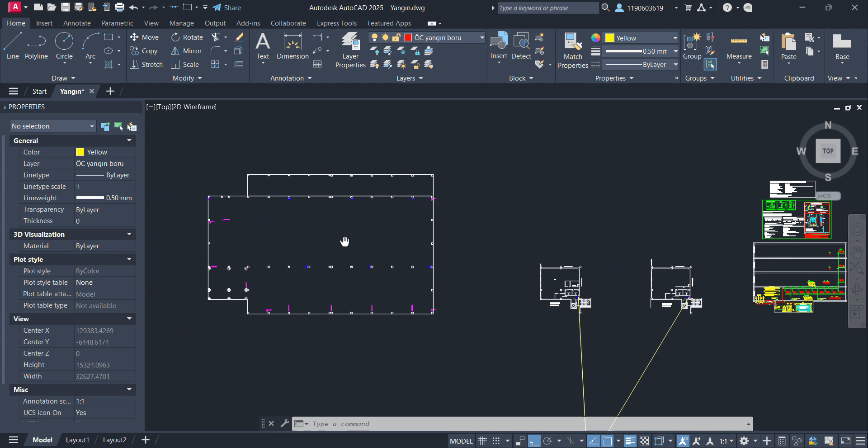I'm Ahmed, and in this video, we will discuss the fire protection system. We will specifically focus on hydrants, HDPE pipes, and fire cabinets, Yangın Dolapları.

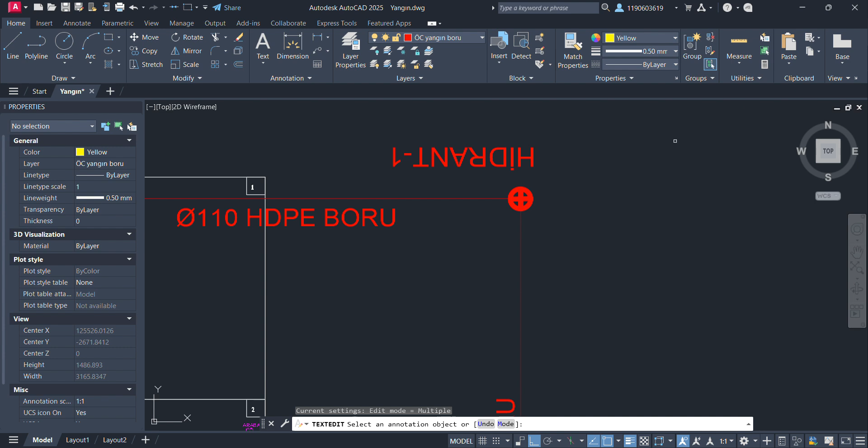Stay with us. This is a 200 square meter factory project, and this is the fire protection plan designed using AutoCAD. The system primarily consists of 4 hydrants, as shown in the plan. They are positioned at each corner of the factory's exterior, and their function is to supply fire trucks with water in case of a fire.

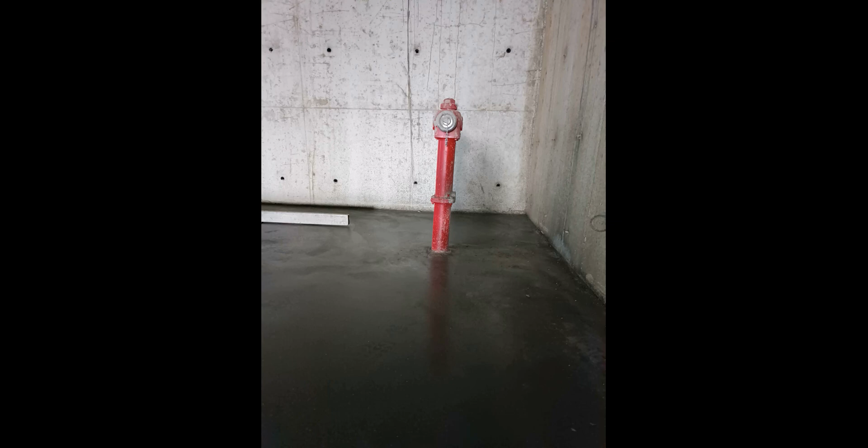These hydrants are connected to HDPE pipes, which are installed underground at a depth of 1 meter to ensure effective water supply to the hydrants. HDPE pipes are chosen for their distinctive features, such as corrosion resistance and ability to withstand high pressures, ensuring the system's durability and efficiency during emergencies.

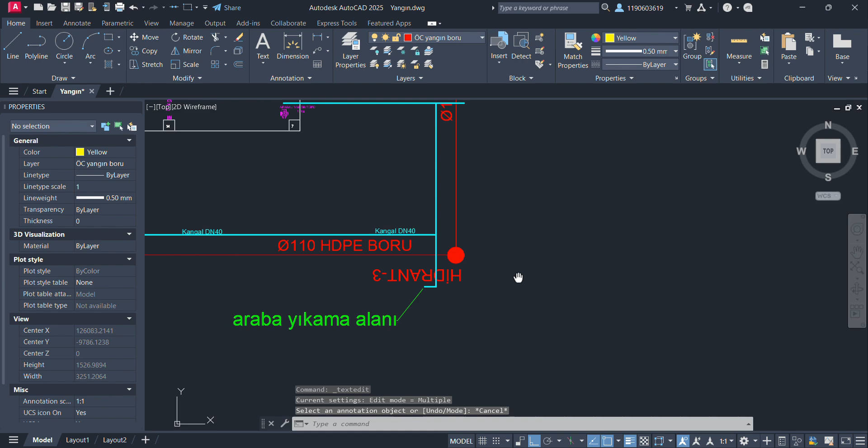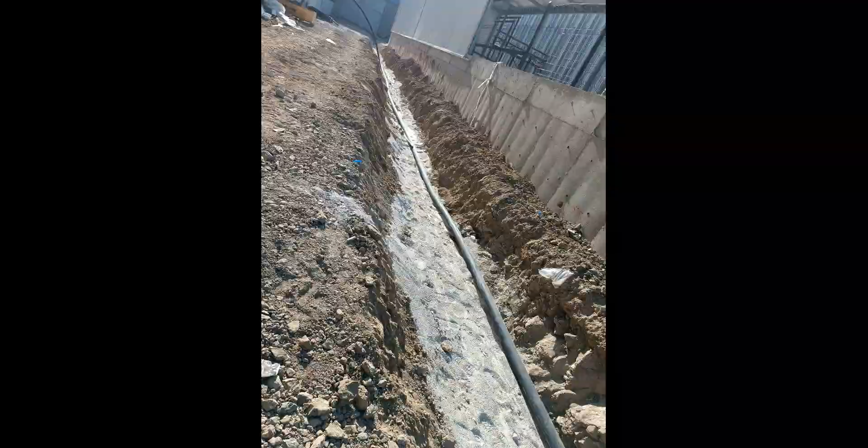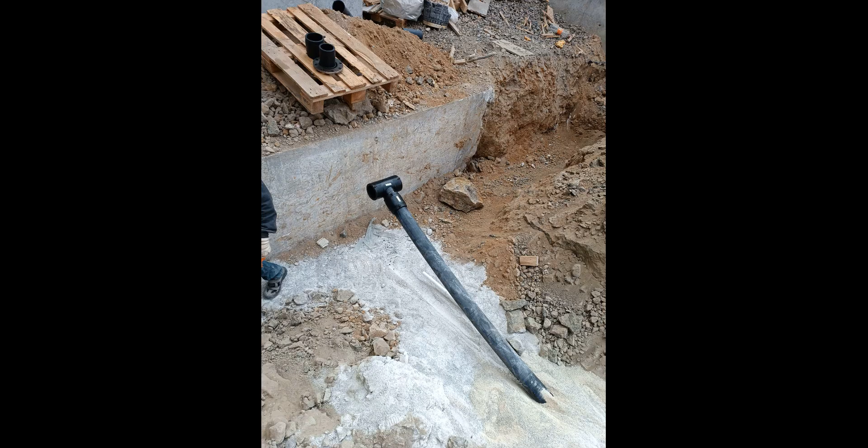Here are some images illustrating HDPE pipes, which are made of high-density polyethylene, HDPE, and are primarily used for water and liquid transportation in infrastructure projects. These pipes are known for their ability to withstand high pressures and their high resistance to corrosion and chemicals. Due to these features, HDPE pipes are an ideal choice for water supply systems in fire protection systems as well as for sewage and water networks.

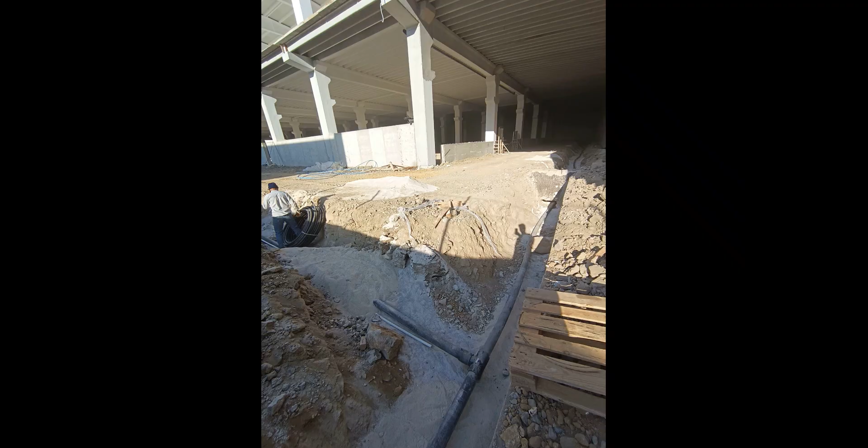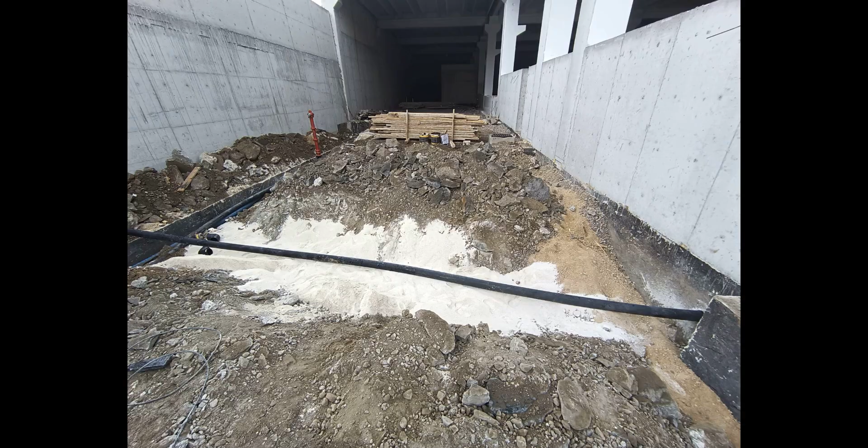Key advantages of HDPE pipes: corrosion resistance. They are not easily affected by chemicals or environmental factors. High flexibility. This makes installation easier in areas prone to ground movements. Long lifespan. They can last for extended periods without requiring intensive maintenance. High strength. They can withstand the high pressures they may face in firefighting systems.

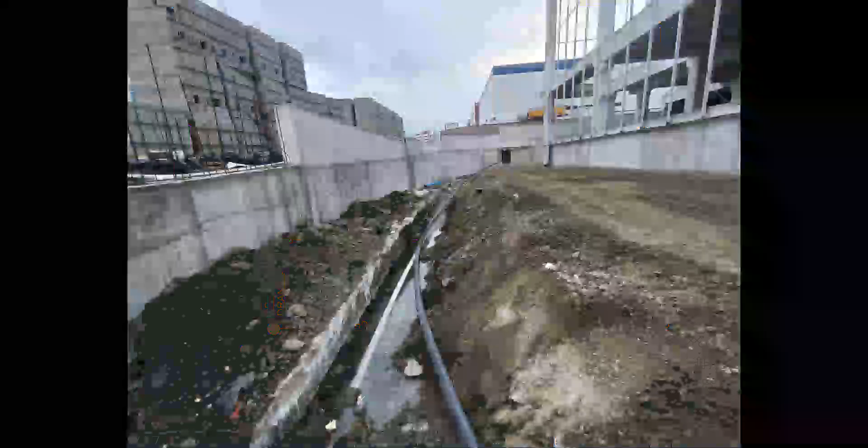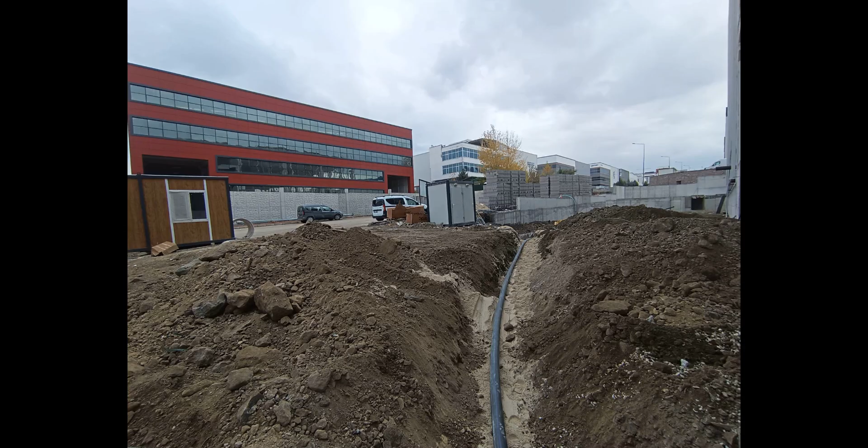The sizes of HDPE pipes vary depending on the number of hydrants used in the project. In this project, 4 hydrants were used, so DN110 size was selected for the HDPE pipes to meet the system's needs effectively. DN110 size means that the internal diameter of the pipe is 110 mm.

The pipe size is determined based on several factors such as water pressure, transport distance, and number of hydrants. In this project, this size was chosen to ensure an adequate water flow to the 4 hydrants with the ability to withstand high pressure during emergencies.

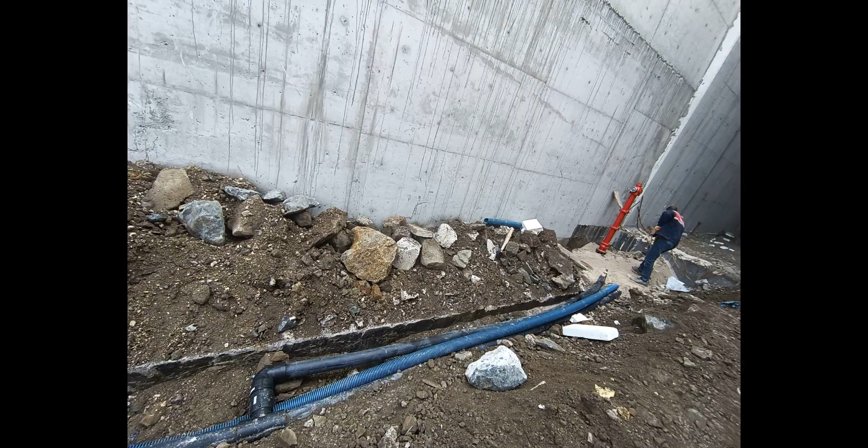Detailed explanation of DN110 size. Internal diameter. DN110 allows a large volume of water to pass, contributing to the system's efficiency. Pressure. The pipes are tested to ensure they can withstand high pressures, especially during fires when large amounts of water are required. Effective water distribution. This size ensures balanced water distribution to all hydrants, ensuring the system's effectiveness during emergencies.

After digging to a depth of 1 meter, fine sand is poured into the bottom of the trench before placing the HDPE pipes. The purpose of this step is to protect the pipes from damage that may occur due to rocks or other materials that could crack the pipes or cause leaks. If the fine sand is not poured, rocks or sharp objects could create holes in the pipes, leading to water leaks or even the failure of the system.

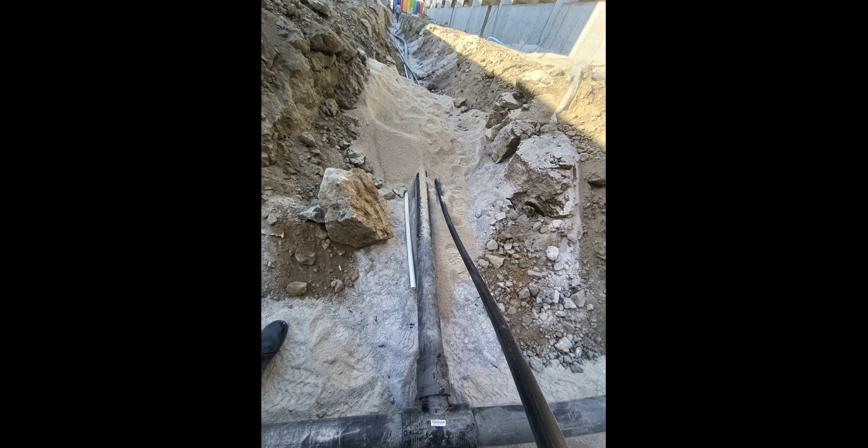Detailed explanation of the importance of pouring fine sand. Protecting pipes from damage. The fine sand acts as a protective layer around the pipes, reducing the risk of friction with rocks or stones during digging or transport. Preventing leaks. With the sand layer in place, the likelihood of leaks caused by uneven pressure or impact with rocks is minimized.

Ensuring pipe stability. Sand helps to stabilize the pipes in the ground, preventing unwanted movement due to ground shifts or vibrations from heavy equipment. Improving performance. Thanks to this protection, the pipes remain in good condition over the long term and function efficiently without issues related to water leakage.

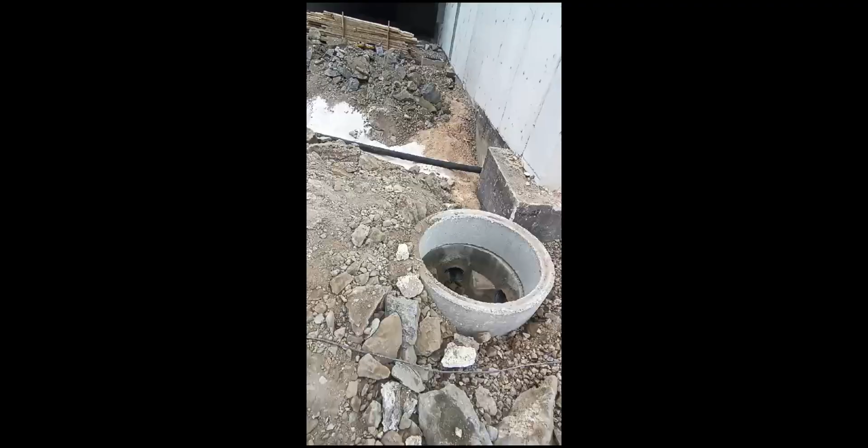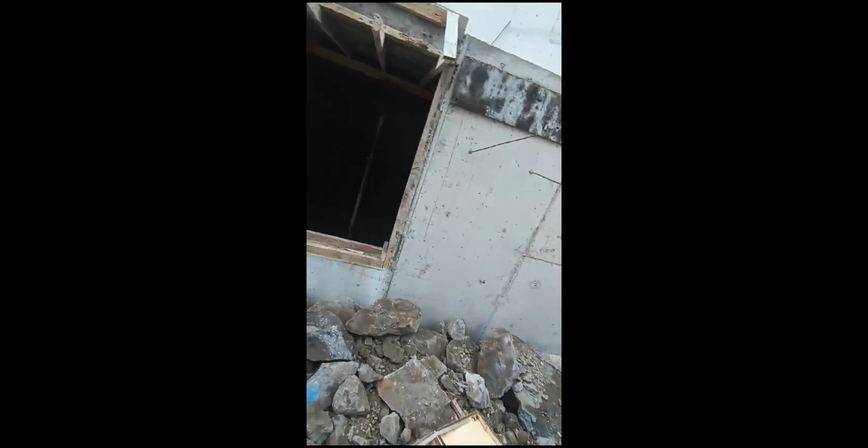After installing the pipes around the factory completely, the pipe is routed into the building to supply the sprinkler line, if present, or the fire cabinet line, Yangın Dolapları, with water. This step is essential to ensure an adequate water supply for the fire protection system inside the building.

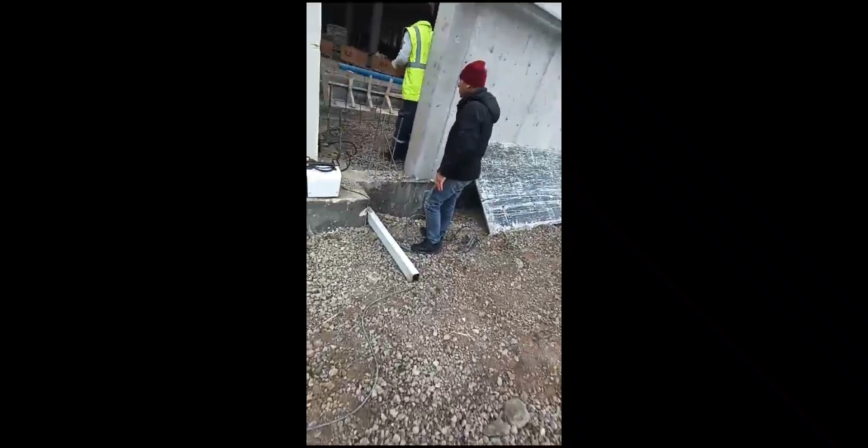The pipes are connected properly to ensure water flow to all points that require supply, such as sprinklers and fire cabinets, enhancing the system's effectiveness during emergencies. Detailed explanation of this process.

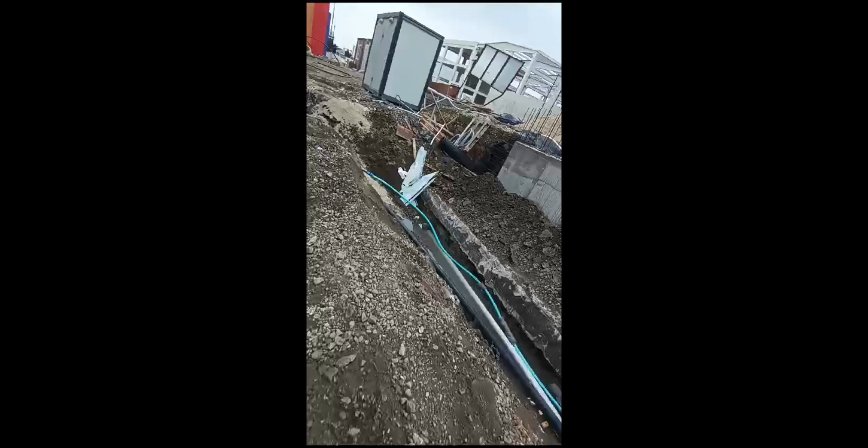Supplying sprinklers. When a sprinkler system is in place, the pipes are connected to provide a continuous water supply during a fire, helping to extinguish the fire quickly. Supplying fire cabinets. For fire cabinets, the pipes are connected to supply water when firefighting teams need it for fire suppression. Ensuring adequate pressure. Through this process, it is ensured that there is sufficient pressure in the lines to provide water efficiently to the critical points inside the factory.

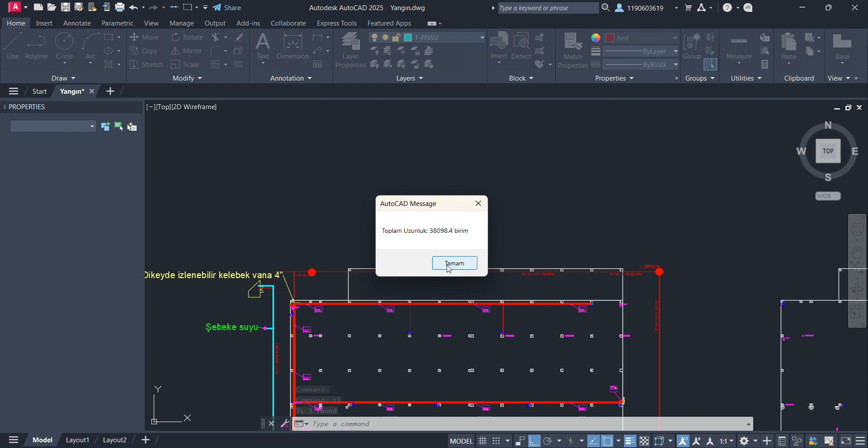In this project, the black pipe shown in the previous video is the HDPE pipe. Now, let's explain about the fire cabinets, Yangın Dolapları, in this two-story factory. 18 fire cabinets have been used to supply the system. The pipes used inside the factory to feed these tanks are either black pipes, siyah boru, or galvanized pipes, galvanized boru. Galvanized pipes are the most resistant, and are generally used in high-risk situations.

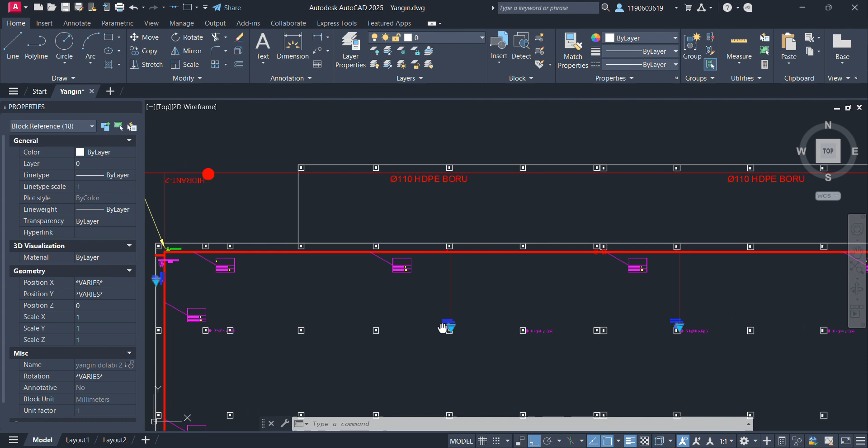The type of pipe is chosen based on the risk level in the factory. If there is high risk, such as the presence of flammable materials or industrial processes that pose a significant threat, galvanized pipes, galvanized boru, should be used to provide the highest level of safety in the system. If the risks are lower, black pipes, siyah boru, can be used.

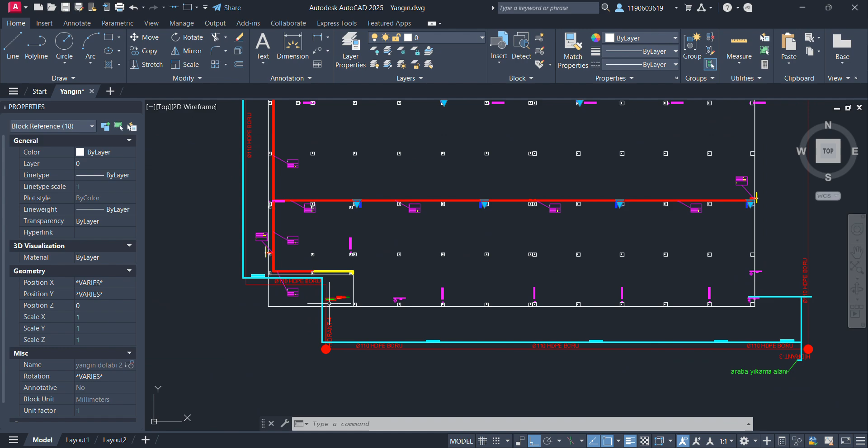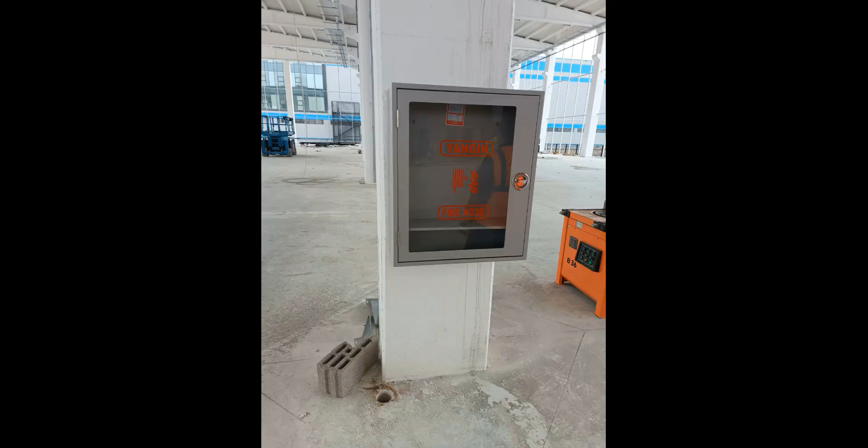The image shown displays black pipes, siyah boru, and galvanized pipes, galvanized boru, as well as water tanks. These tanks are connected to the pipes after being securely fixed to ensure system integrity and prevent any leakage.

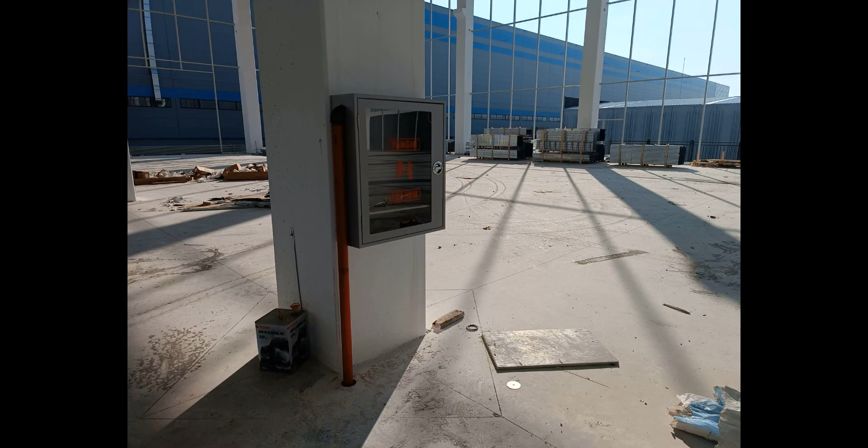The tanks contain valves, vana, to control water flow, and a 30-meter flexible hose is used when there is a need to deliver water to distant areas within the facility or to areas that are difficult to reach directly using the fixed pipes. These hoses are chosen for their flexibility and ease of use, allowing for quick maneuvering and directing water to the required points efficiently.

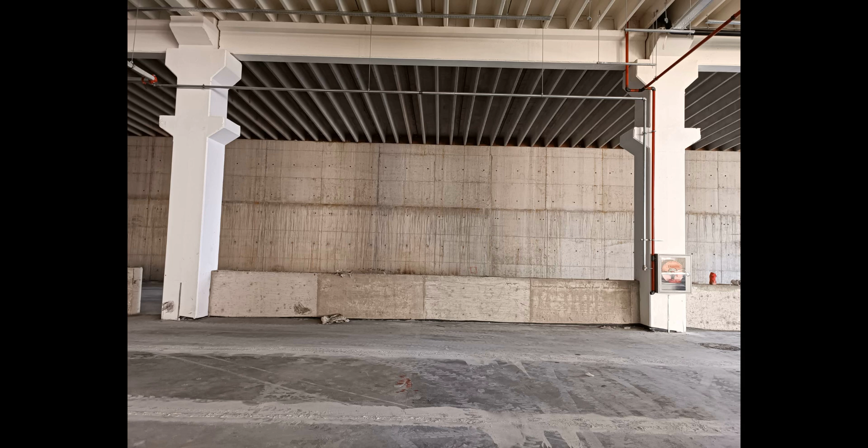Detailed explanation of tanks, valves, and the hose. Tanks act as a water backup supply used during emergencies, such as fires. They are securely connected to the pipes to ensure water is available at all times. Valves, vana, these allow control over the water flow within the system, enabling operators to easily open or close the water flow according to the system's needs.

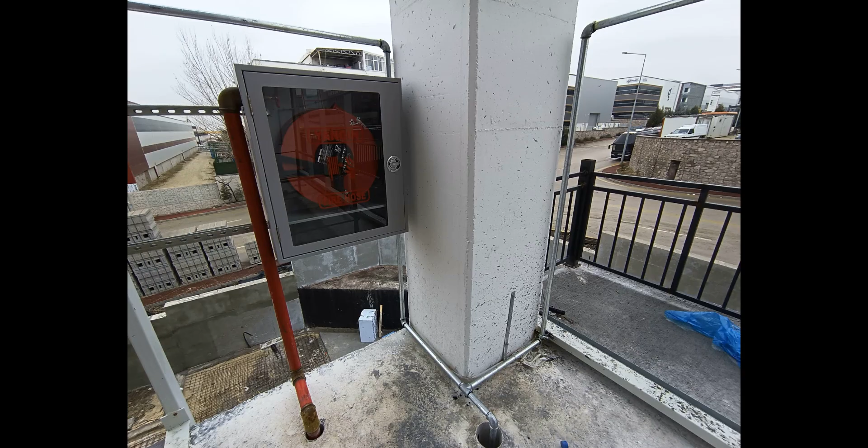Flexible hose, 30 meters. This hose is flexible, allowing access to hard-to-reach areas that cannot be covered by fixed pipes. It is used to distribute water from the tanks to critical points within the factory or to spread water to areas that need fire suppression.

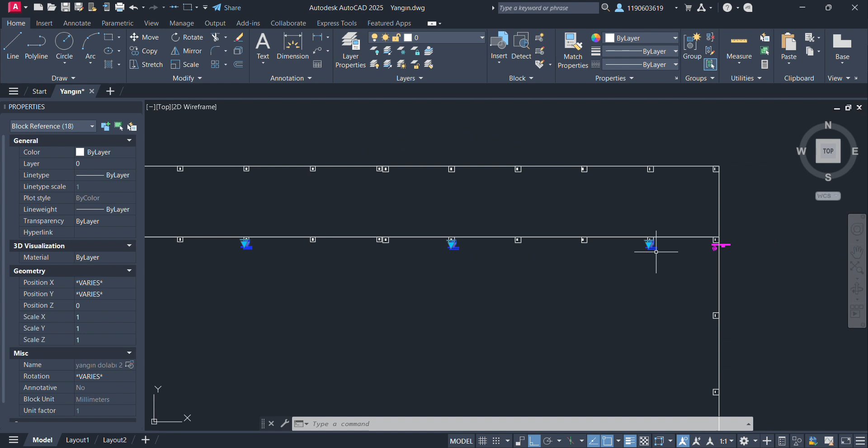Now, I will leave you with the video where I will explain about the fire hose cabinet, Yangın Dolapları, in detail. We will discuss its importance in the factory and how to use it properly. Yangın Dolapları is an essential firefighting device, used for small to medium fires to stop them before they escalate and pose a greater threat. Detailed explanation of Yangın Dolapları.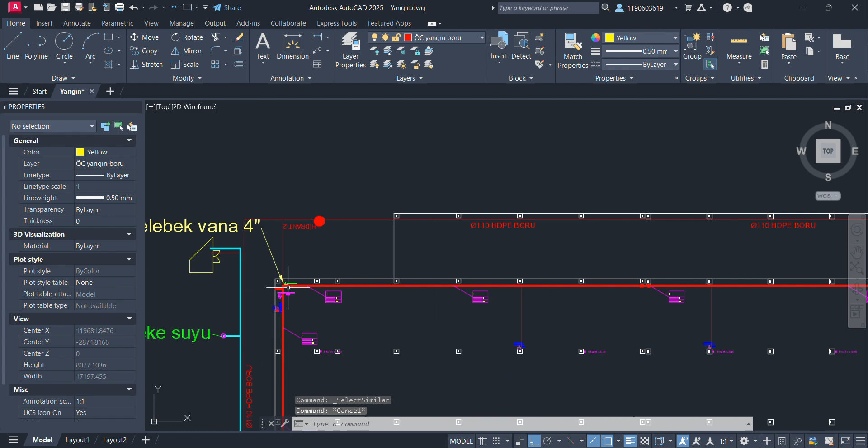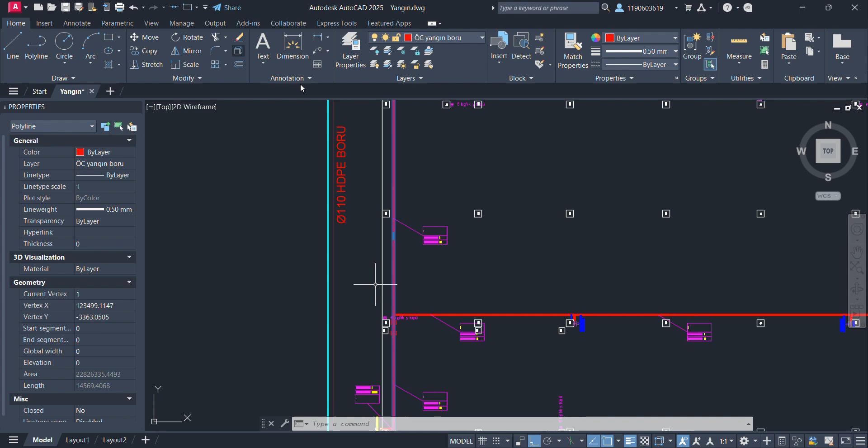Types of fire extinguishers. There are different types of extinguishers based on the type of fire they handle. Water extinguishers, used for fires involving solid materials like wood or paper. Foam extinguishers, used for fires caused by flammable liquids like gasoline or oils. Dry powder extinguishers, used for fires involving electrical equipment or combustible metals. Carbon dioxide extinguishers, used for fires involving electrical devices and electronic systems.

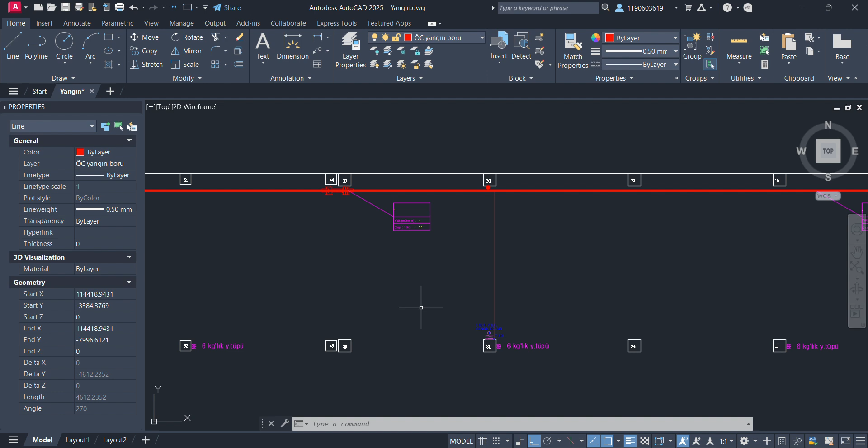Placement of fire extinguishers. Fire extinguishers should be placed in clear and easily accessible locations, near hot spots or areas that may experience fires such as kitchens, electrical rooms, and storage areas. Importance of fire extinguishers in a factory. Fire extinguishers are essential devices that help control fires in their early stages, reducing material damage and protecting lives. Using them quickly and effectively can prevent fire spread and reduce its negative impact.